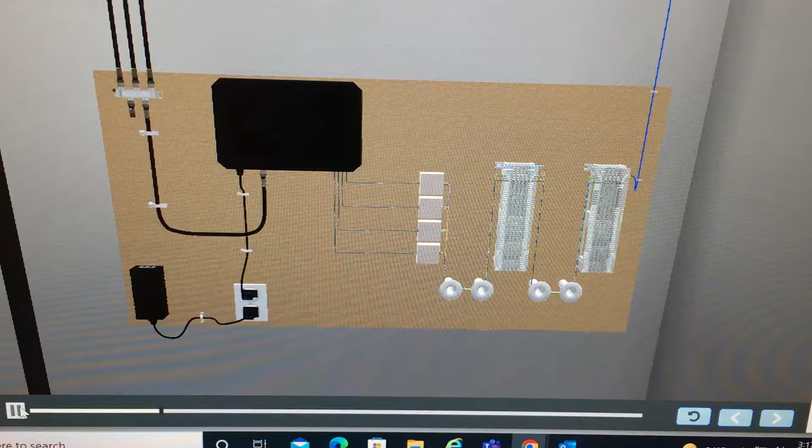Network sim. You are finishing up a commercial Ethernet installation. You need to make an Ethernet jumper to connect the customer's switch and router in the telecommunications room. Click the Next button.

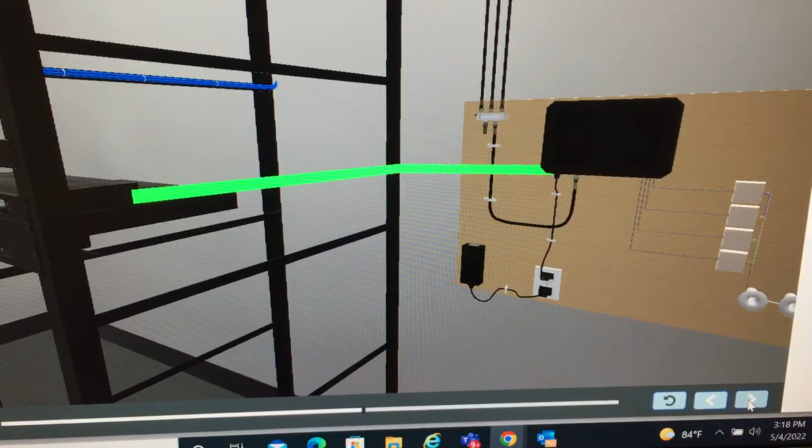Start by measuring the distance between the switch and the router that you are connecting. After measuring between the equipment, you determine that a 7-foot cable of Category 5E cable is the right length. Click the Next button. Click the box of cable to pull 7 feet of Category 5E cable from inside the box. Next, you will need to place a connector on both ends of the cable.

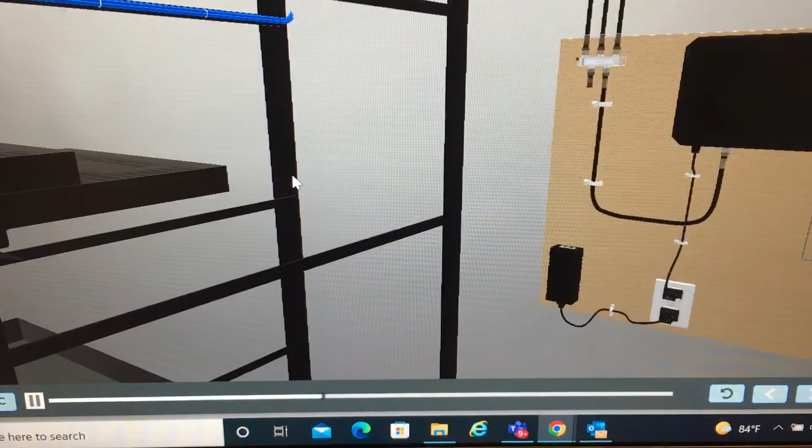The tools needed to place a connector on each end are a jacket stripper, crimper, and snips. Click the Next button. You prep the end of the cable by scoring 3/4 of an inch of the outer jacket with the cable stripper. Click the stripper to prep the end.

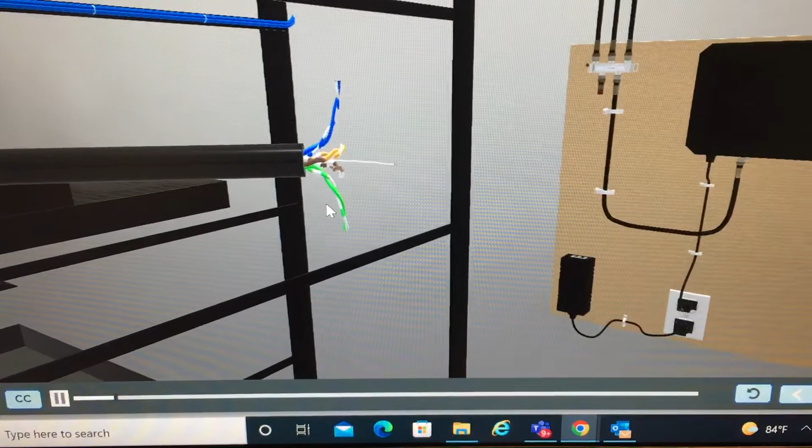Next, bend the jacket at the score marking and pull the cut jacket from the cable. Trim the ripcord flush with the remaining jacket. Then prep the wire pairs by untwisting them and flatten them out by running them through your thumb and forefinger. Click the cable to trim and flatten the wires.

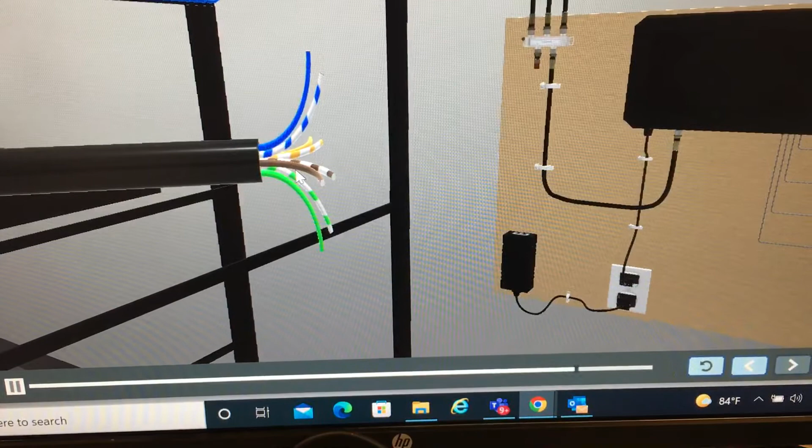Now put the wires in the right order of orange and white, orange, green and white, blue, blue and white, green, brown and white, brown. With the wires straight and in the correct order, use the cutter on the crimping tool to trim the wires to the correct length. Click the crimper to cut the wires.

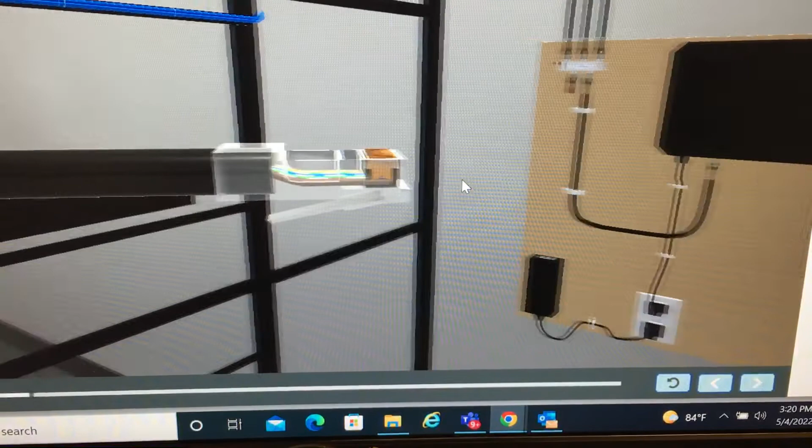Insert the prepped cable end onto the RJ45 connector. The RJ45 connector should have the orientation of the clip facing down. Click the connector to install it. To verify the cable is on the connector, you should see the copper wires touching the end of the connector. Click the Next button.

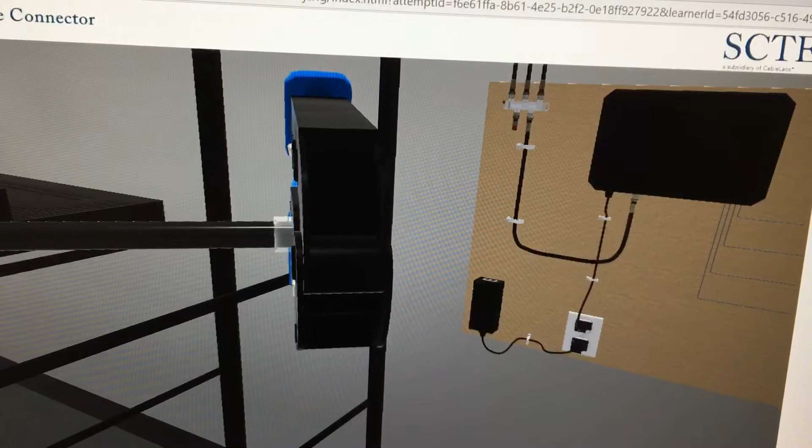Now place the connector and wire into the crimper. Before squeezing the crimper, you should check that the jacket is in the connector. This will secure the connector to the wire when you crimp it. Before crimping the connector, check that the pairs of wires are still all the way in. Click on the crimper to check the connector.

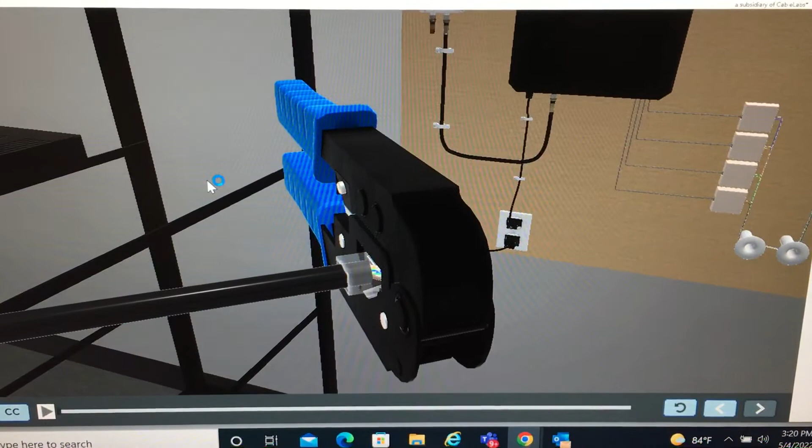After the final checks, you will squeeze the crimper, locking the connector onto the cable. Now, repeat the same procedure for the other side of the cable. Click the Next button. After completing both ends, use a cable tester to verify that the cable is functioning.

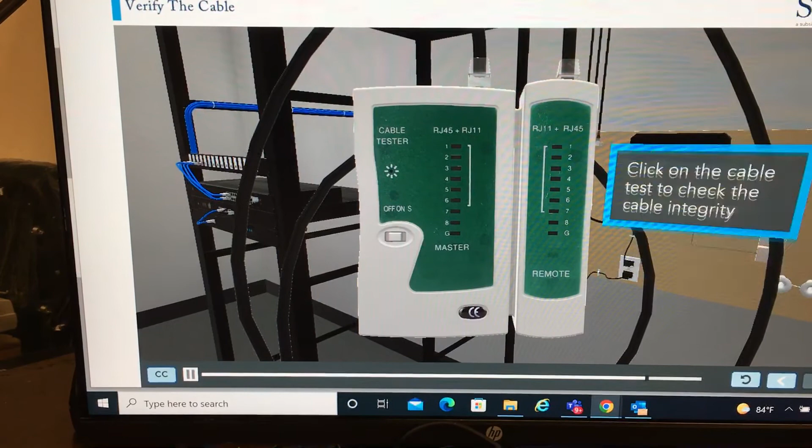Since the two pieces of equipment are different, you need a straight-through cable. Wires 1 through 8 should match up on both ends. The lights on the tester cycle 1 through 8 in a straight line if the cable is correct. Click on the tester to verify the cable. With the cable verified, you would connect the switch and router.

Congratulations, you've completed this network sim. You may close this lesson and return to your course.